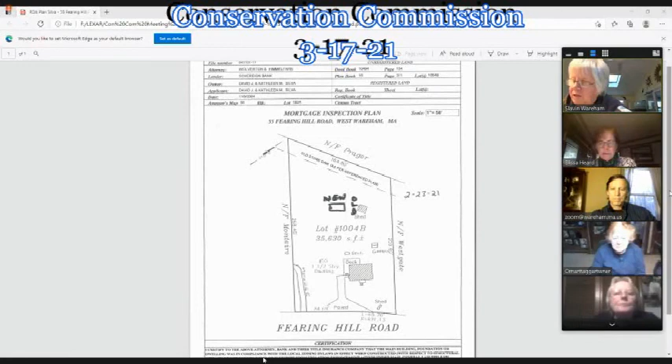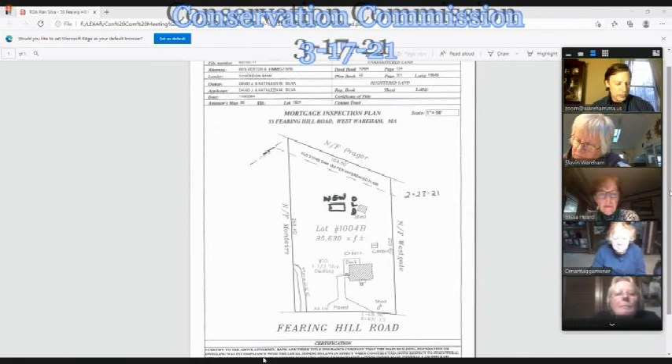Okay, this project is at 55 Fearing Hill Road, and the project involves the construction of a shed in the buffer zone to bordering vegetated wetland. A 12 by 20 foot shed is proposed, approximately 50 feet from the wetland at the site. The shed would be supported on 6 sonotube footings. The location where the shed is proposed is in the same vicinity as a previously existing smaller shed in the yard area of the site.

There's no tree cutting that would be necessary or machinery to be used for the project. So I would recommend the approval of the project with a negative determination number 3.

Okay, somebody has not muted themselves. Please look. Who's not muted? Someone's listening to a television or something. This is not pleasant. Thank you for the courtesy.

Okay, David, is there anything you wanted to add to that description? That Dave Silva or Dave Bichette? Dave Silva. Okay. No, I have no comment. Thank you. Questions on the board? Do we have anything from Michael? Zero, today seemed pretty basic to me. I'm good. Thank you. Elissa? No. Ron? No. Kwame? No. Mary? No question. Carol? Sandy, I'm all set. Is there anybody online that would like to speak for or against this project?

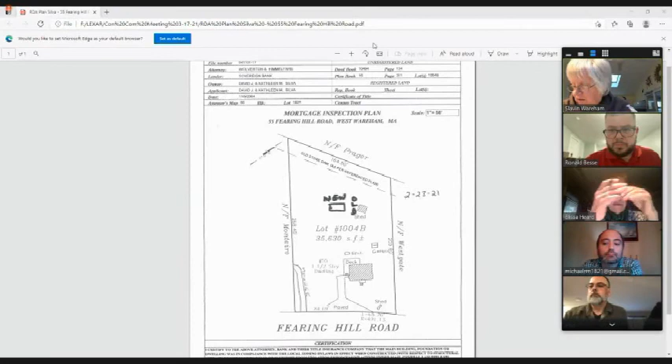Hearing none, I would move to close the hearing. Second. Okay, I have a motion to close and a second. Michael? Elissa? Lisa? Ron? Yes. Kwame? Yes. Mary? Yes. Carol? Elissa? Yes. Sandy? Lisa? We'll try. Ms. Heard. I got that one. So yeah, the hearing, okay. All right. The hearing is closed.

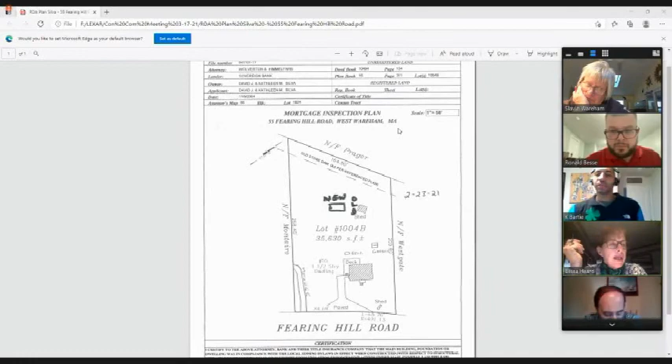We accept the project as stated with a negative 3. Second. Second. I have a motion and a second in favor. Michael? Yes. Ms. Heard? Yes. Yes. Did you? Oh, Ron? Yes. Kwame? Yes. Mary? Yes. Carol? Yes. Sandy? Okay, it's approved. So David, see Mr. Bichette before you start the work, but you're approved. Thank you. Thank you. Good.

Pursuant to the provisions of the Massachusetts Wetland Protection Act, General Laws, Chapter 131, Section 40, and the Wareham Wetland Protection Bylaw, Division 6, a public hearing will be held on Wednesday, March 17th at 6:30 p.m. Here you go. All yours. On the request for determination of applicability for Paul Somers, 6 Oak Terrace, Wareham, Mass. 02571, to construct an addition located on Assessor's Map 39, Lot T25, 25 Oak Street, Wareham, Mass. Yes, is there anybody here to speak for this project? Please identify yourself. Yes, Paul Somers is here. Thank you. Mr. Bichette will read to the project.

The project site is at 25 Oak Street, and the project involves the construction of an addition in the buffer zone to a coastal bank at the site. A 13 by 14 foot addition with an extension that goes across the front of the house, which is approximately 5 feet wide, is proposed. And this is approximately 50 feet from the top of the bank, which is a seawall at the site. The addition would be constructed between the street and the house as shown on the plan.

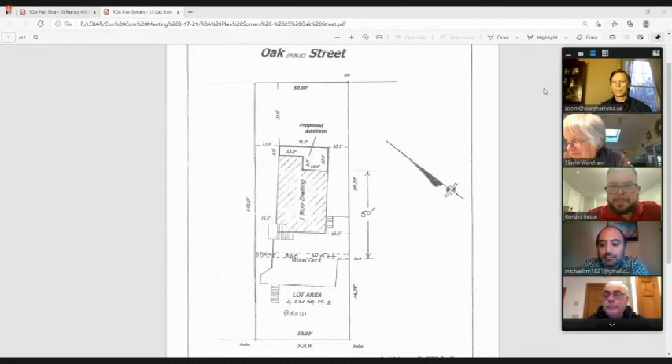Thank you. Before I ask the board, I want to make clear that Paul and I are next door neighbors on his home, not where this one is located, but we do have a common lot line, and my cat visits him all the time. So I will ask the board for questions. Michael. No questions. Miss Heard. No. Ron. No. Kwame. No questions, thanks. Mary. No question. Carol. No questions.

My question, this is going to be between the house and the wall that exists there already, right? That is correct. So the wall will be the edge of the addition. No, not quite to the wall. Not quite to the wall. Okay. We're extended out 13 feet from the existing house, and we're about 8 feet from the wall. Okay, it was not staked out. I felt the wall was probably one of the outermost limits of the addition. No, we are probably 8 feet from the wall, the existing wall on the street side.

Does anybody want to visit the site if it's staked out, or are you comfortable with it as you've seen it on the plan or may have visited it? How about you, Sandy, since you know it? What do you think? Well, I visited it and I thought the wall was the extent. I mean, it's all flat. It's between the house and the concrete wall. It's no closer to the wall, to the water than his hard walkway.

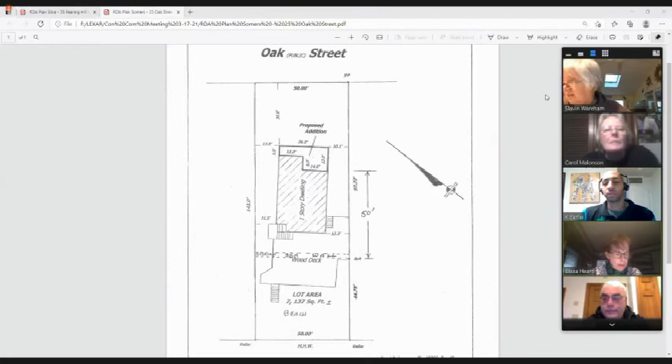So you're saying no question? Yeah. I'm comfortable. I mean, I thought the wall was the extent and he's not going quite as far to the wall, but I didn't need a stake to identify the location of this addition. Questions? We went through that. Anybody online that would like to comment on this project?

Yeah, just another question. Can you hear me? Yes, I can, Michael. Okay, because the last 2 times you asked my opinion, you just said Ms. Heard. So I just want to make sure you heard me. All right. I hear you. Thanks.

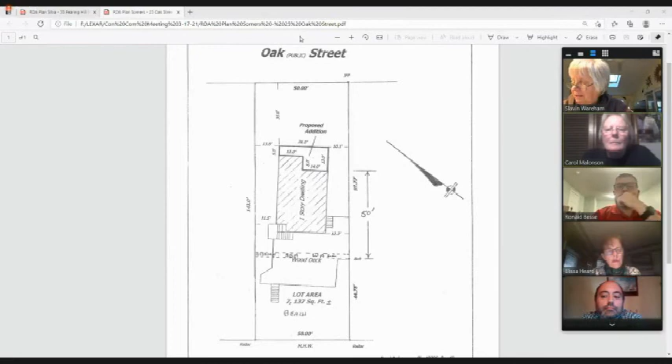I'm hearing none. No comments. Motion to close. I have a motion to close the hearing. Second. I have a second. All in favor. Michael? Yes. Ms. Heard? Yes. Ron? Yes. Okay. Yes. Mary? Yes. Carol? Sandy, the hearing is closed.

Yes. To accept the project as stated with a -3. Second. All in favor of a -3, Michael? Yes. Ms. Heard? Yeah. Ron? Yes. Kwame? Yes. Mary? Yes. Carol? Sandy? Yes. It is permitted. And Paul, see Mr. Bichette before you start any work on the project, and thank you.

Oh, I have a quick question for you. You're going to be parking off the street, right? Yes, we are. Thank you. You're very welcome. Thank you, folks. Appreciate it. Have a nice night.

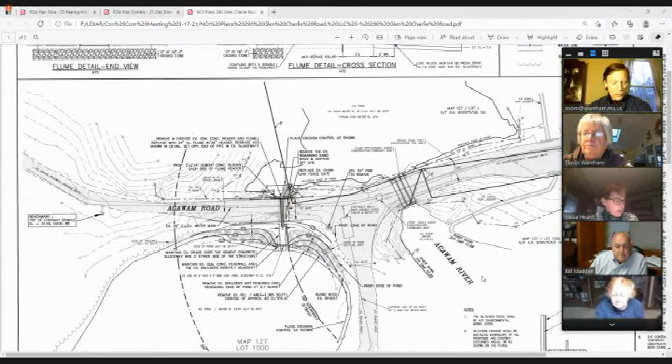Thank you. Is there anybody here for this project to represent? Bill Madden, on behalf of the applicant from GAF Engineering. Hi, Bill. Mr. Besse, your turn. Okay, so the project site is at 290 Glen Charlie Road, which is the Maple Park Campground. And this project is right next to the project we recently permitted to reconstruct the flumes under the access road to the campgrounds. This notice of intent is being filed to address a previous violation that involved unpermitted placement of fill in the pond by the previous owner.

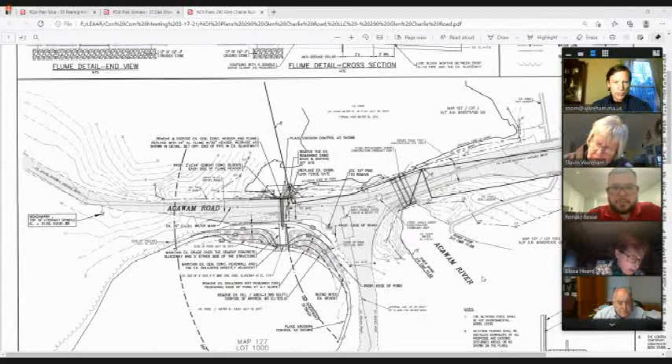This issue was discussed during the previous hearing, and it was a requirement of the order of conditions that they follow up with a notice of intent to address this previous violation. So this project involves the removal of fill material from the pond, and the site is also within the estimated habitat of rare and endangered species. An excavator will scoop approximately 90 yards of material out of the project area, loaded into trucks for removal to achieve the grades shown on the plan. And that's all sort of within this area right here where the cursor is moving around the plan.

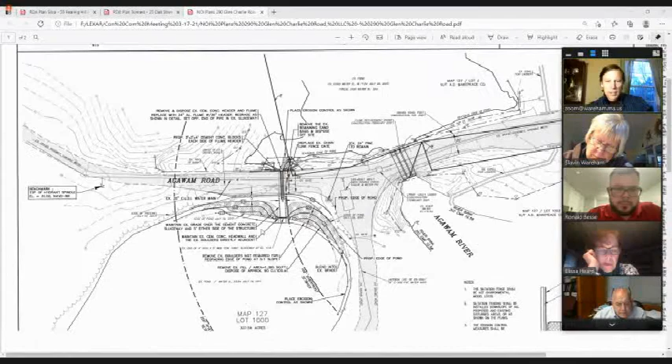Also proposed is to construct a small Traprock detention basin at the end of the entrance road, which is closest to Glen Charlie Road. And this would be approximately 50 feet in length and about 6.5 feet wide, and would be right up against the 30-foot no activity zone. And I'll just have Bill kind of explain the reasoning for that. I think there's a small area where it tends to wash out and gully a bit. That's why that is being put in there, I believe.

We did get a DEP file number for the project, but at this point, I have not gotten any comments from Mass Natural Heritage on this project. So I would have to recommend a continuance for their comments until the next meeting.

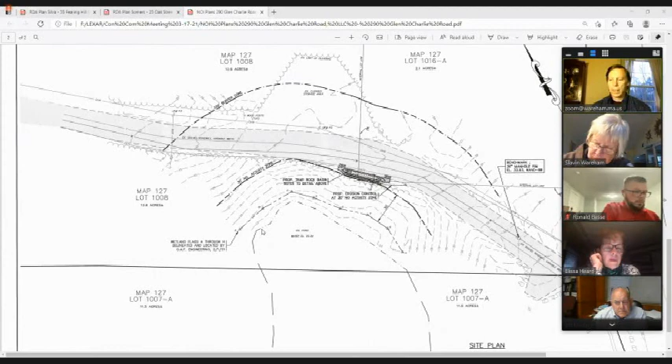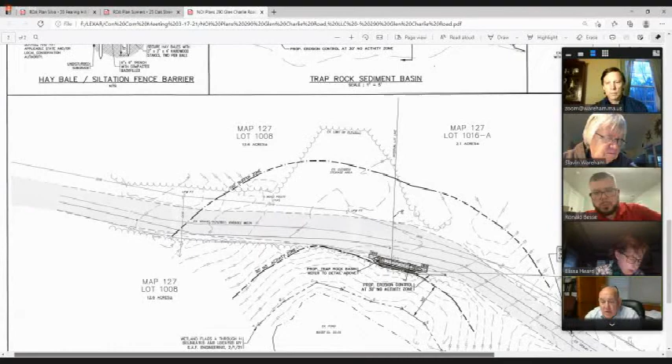Hey, Bill, can you comment on? Yeah, sure. That area that we're showing the Traprock sediment basin is right against the edge of the gravel road into the park. It looks to me that might have been graded in a manner that would allow water that collected there to drain off the site into the adjacent land.

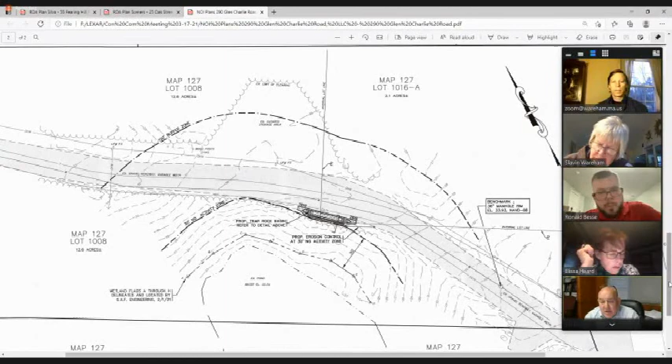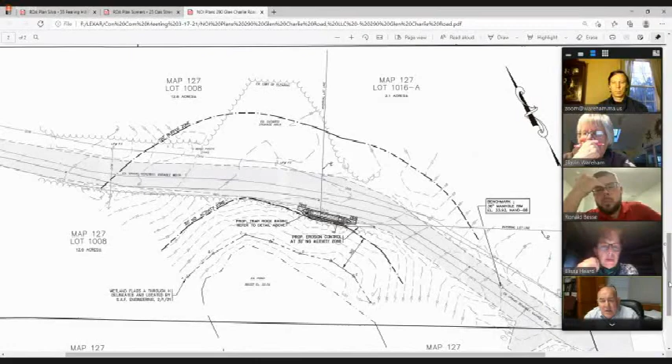So in an effort to retain the drainage characteristics there, we thought it would be wise to place this Traprock basin at that location so that we could intercept the water, trap the sediment, and allow any excess water to overflow relatively sediment-free into the buffer zone. So we took the footprint of what was there and we fit that little Traprock basin in there. There's a cross section on the top portion of the sheet to the right-hand side that'll probably show that it's roughly 6 feet wide.

That number 28.5, that's the elevation of the roadway. The 28 is the elevation of the top of the Traprock basin. We show it being excavated roughly 18 inches deep and filled with stone to trap the sediment. We also separate the filter stone from the subgrade through the placement of a piece of filter fabric so that in the event that basin needs to be maintained over time, it's readily excavated out and stone replaced.

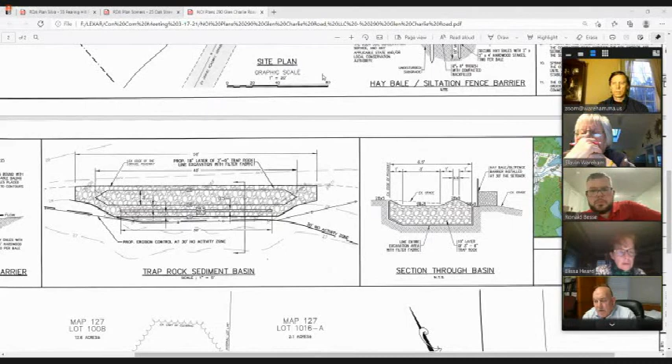We also show a hay bale and silt fence barrier that's right at the property line. So really it's a filter berm of some type to trap sediment and prevent any alteration of the resource area. That's what we have proposed at the entrance. Can you talk about the fill into the pond? Sure. What it will look like when you're done?

Well, what it'll look like when they're done is there's an existing concrete sluiceway that goes under Agawam Road. So starting on the north side of the pond, that's a concrete flume structure now that's in total disrepair. So we would like to replace that with a new aluminum structure, anchor it in place with a couple of 2 by 2 by 4 foot concrete blocks,

remove some of the super sacks that are in that area from 10 years ago, and reshape a little of that disturbed area around those blocks, and regrade that off just slightly. I didn't see where I noted on the plan to permanently stabilize that area, but I would maintain that we would stabilize that in the manner that we did on the flume construction project. And seeing as we're continuing the hearing, I'll add a note for that permanent stabilization.

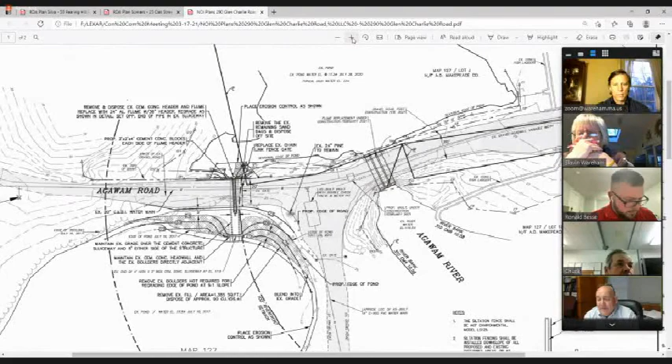That aluminum barrel section will be placed inside the concrete sluiceway. And what we tried to do is just maintain the top of the sluiceway. And I was hoping to grade it in a manner that we wouldn't create a hazard to somebody if they found their way on the top of it. So we slope it off at a 5-to-1 from the top of the slope, which is right about elevation 25, right to where the road is, down to elevation 22. So we'll have a 5-to-1 very gradual slope, similar to what you see on other portions of the pond, particularly down along the west side of the access road into the campground.

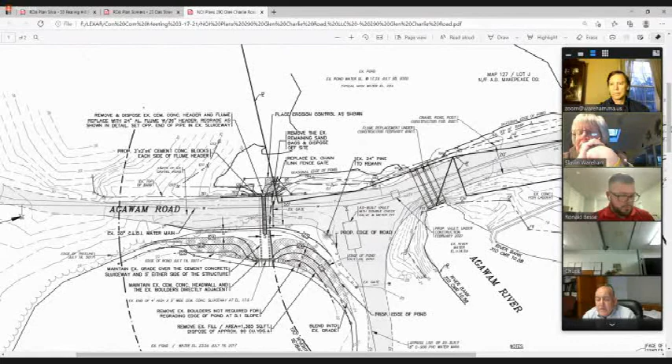Bill, excuse me, Chuck, will you please mute yourself? Chuck. Oh. Thank you. I'm sorry, Mr. Madden. Continue. That's a little time consuming. That's fine.

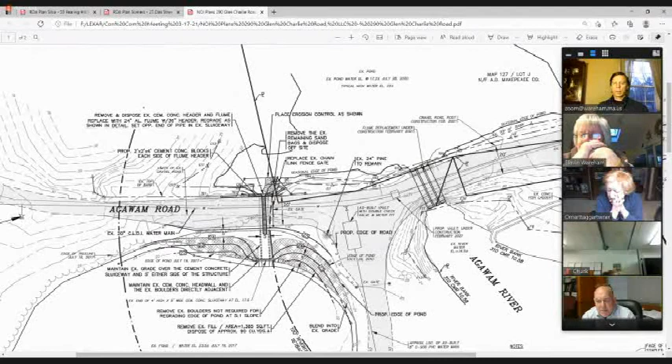So essentially what you're going to see is very similar to what you see along the west side of the access road into the campground. And it will be a gradual 5-to-1 slope beach area. It'll be strictly sand. There's no vegetation proposed. Historically, that's the way that pond was. We wish we didn't have to remove the material, but if it's the wish of the commission, we will do that. That's pretty much what we will have there.

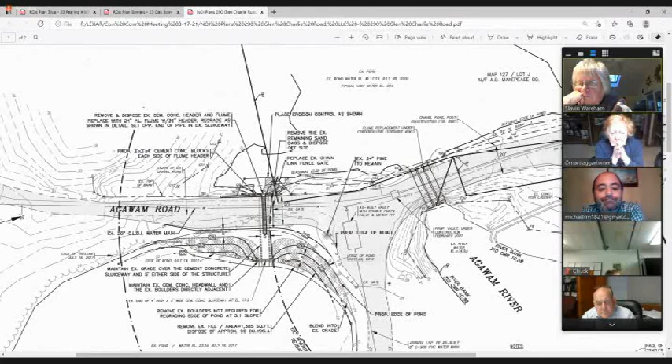Thank you. Okay, questions, Michael? No, none. Ms. Heard? I guess the only question I had is that last comment by Bill. Is there any way that it can be left where it is, Dave? Or is it just... Well, the fill is the subject of the violation. So that was put in there where it should not have been placed. And that's why the proposal has come forth to remove it.

And the fill won't be anywhere near that place when it's redone? Well, they're going to truck the fill away from what I'm told. Right. But I mean, they're putting something back in its place. Is that correct or no? No. So basically they filled in part of the pond previously and now they're removing the fill. So it'll just go back to being more pond. Okay. But there'll be a beach or a swim area. Is that what I'm getting?

It's probably outside the actual swim area for the park, but it will be a sandy beach area. We expect that the material that's underlying the fill is going to be very similar in character, if not identical, to the fill material. So it'll be pretty close to what it was prior to the placement of the fill.

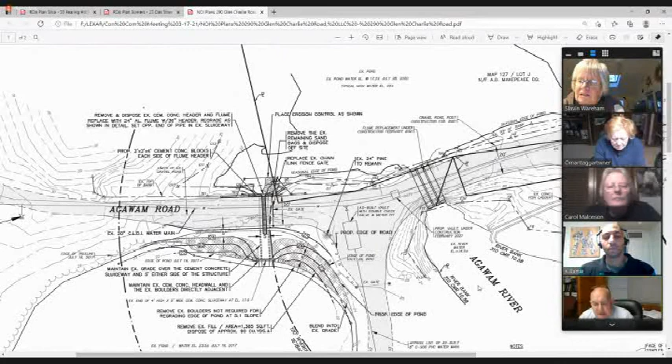Okay. Ron? No questions. Kwame? No questions, thanks. Mary? No questions. Carol? No questions. My question is, people could still go down there, right? To be on the edge of the pond if they want to fish? Well, I don't know if that pond is open for fishing. I know along the west side of it, as we go down toward where the gate is into the campground, I know that there's signage posted about no fishing in that area. Okay, thank you.

Okay. Anybody on the line would like to speak to this project? Are we good to continue it until April 7th, waiting for the natural habitat comments? Yes. Okay. I move that we postpone this decision until the next meeting, which is April 7th. Okay. I have a motion to continue until April 7th. Second. I have a second.

All in favor, Michael? Miss Heard? Yes. Ron? Yes. Kwame? Yes. Mary? Yes. Carol? Sandy? Okay, yes. Until the 7th. Thank you, until we get the documents we're missing. Thank you. Public hearing.

Pursuant to the provisions of the Massachusetts Wetland Protection Act, General Laws, Chapter 131, Section 40, and the Wareham Wetland Protection Bylaw, Division 6, a public hearing will be held on Wednesday, March 17th, 2021 at 6:30 p.m. on the notice of intent for John Chuckran, care of Michael J. Koska and Associates, Inc., 98 Broad Street, Bridgewater, Mass., to repair a seawall located on Assessor's Map 3, Lot LC1 & LC2, 28 Fishermans Cove, Wareham, Mass.

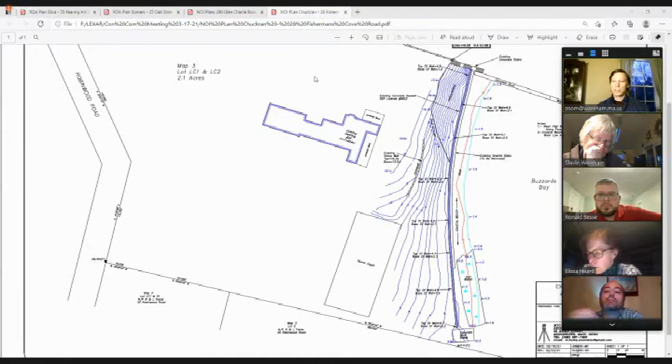Okay. And then you mentioned that there might potentially be other permitting agencies. Do we know who they are other than waiting on some comments from the Marine Fishery? In the DEP file number comments, they mentioned that the Army Corps of Engineers may need to look at it, or there may need to be a 401 water quality cert. So I think those are things that other agencies would have to address. I think it was just stated on the file number sheet, but that's something that would come after an approval from us if we approve the project. Okay. That's it. Thank you.

Yeah. Kwame? No questions. Mary? No question. Carol? No questions. Sandy, I have questions. Is the seawall down there failing now? It's in disrepair in the sense that I believe they've analyzed it and that it needs to be reinforced. That's why the material is placed in the front of it. So we're trying to get rid of the material in the front of it and increase it for the next 50 years or so. So that's why the riprap was placed in front of the granite blocks? I believe so. As I said, I'm assisting with it, but I think that was the purpose, to increase the stability of it. And it needs to be done correctly so that we can remove those granite blocks.

The stakes that were on the site, what do they represent? They may be survey control points. I'm not sure what those represent. So the top of the new seawall will not go any further into the lawn than what's there now? Correct. The top of the seawall is going to be I think 8 inches or so higher than what's there now. So it's not going to come landward. Okay, it'll just go higher, not wider.

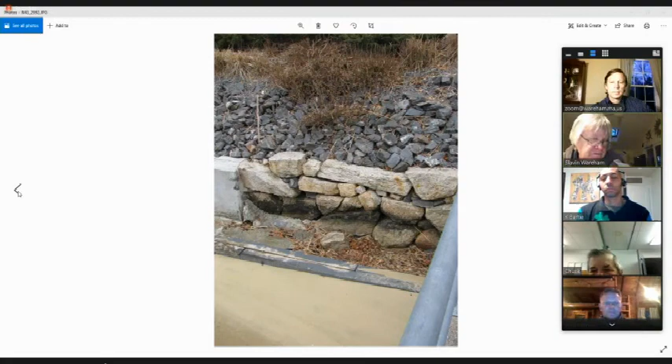So there'll be no machinery on the beach at low tide to make that happen? There will be small machinery, a kind of mini excavator. And how will you get that in and out of there? Down the existing boat ramp. Boat ramp. The minute I asked the question, I said, there's a boat ramp on the west side. That's how they're going to get down there. So Dave, we're going to have to make a stipulation that all work must be done at so many hours between low tide. Yes, that would be agreeable.

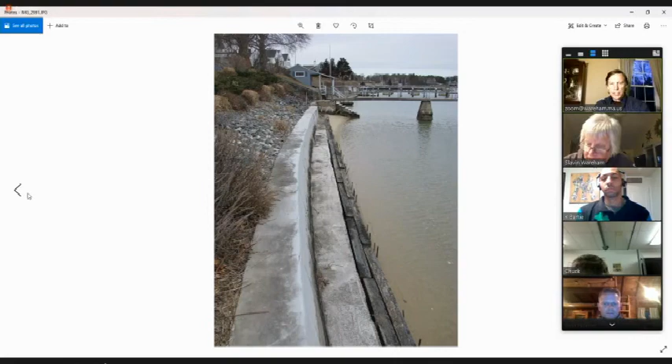Yeah, this is not something I had been made aware of before, as far as there needing to be some sort of a small machine on the beach. I was under the impression that they would pluck those things out with an arm reaching over the top. If there's going to be some sort of machine, then yes, we would definitely, when the time comes, have to condition that we have construction mats, if that's the methodology the commission is comfortable with allowing, and it certainly would have to be done at the appropriate tides.

Okay. I think that was me. So you're saying that the granite blocks will be stored on site upland? Well, they may remove them completely from the site, but I thought I heard them say that the granite blocks would be stored upland. No, Brad? Once the granite is removed, it would be advantageous to haul it right off the site, since the machinery would have it in its grasp, and therefore it would make all the sense in the world to just haul it right off site.

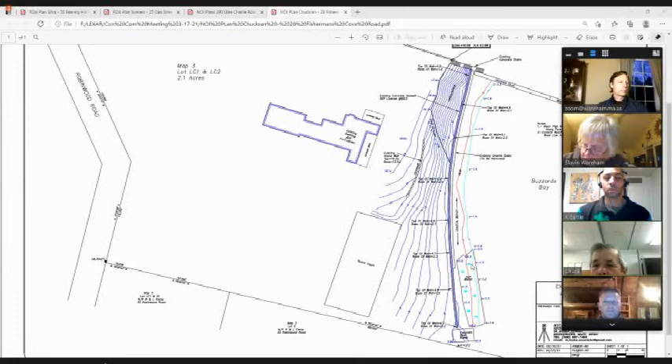Okay, and the same thing with the concrete that's going to be broken up? Yes. Now, how do you plan to maintain the soil in the upland when all this machinery is going to be going over it during the soft soil time, as opposed to winter? That would be accomplished with landscape mats, so the equipment would be going over the mats covering the lawn area, hence creating no or very minor disturbance. Okay, thank you. Is there anybody online that would like to speak for or against this project?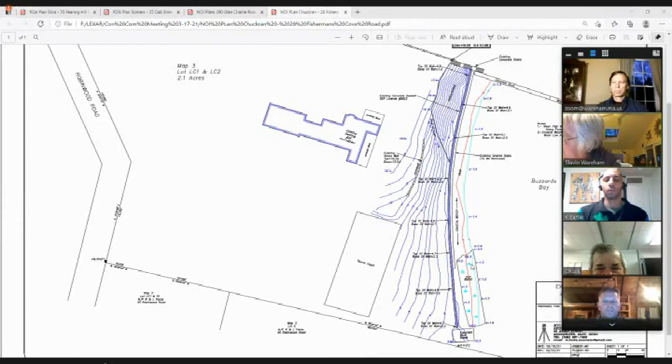I'm seeing none. I'll take a motion. Do you think we would have the answers from Mass Marine Fisheries by the 7th, Dave? I think we should by then, yes. Then I'd take a motion to continue until April 7th. Motion. I have a motion. Second. I have a second. All in favor, Michael? Yes. Ms. Heard? Yes. Ron? Yes. Kwame? Yes. Mary? Yes. Carol? Sandy? We're continued until the 7th, waiting for some input from Mass Marine Fisheries. Thank you, everybody. Thank you, members of the commission, for the time tonight.

Notice of public hearing pursuant to the provisions of the Massachusetts Wetland Protection Act, General Laws, Chapter 131, Section 40, and the Wareham Wetland Protective Bylaw, Division 6. Public hearing will be held on Wednesday, March 17th, 2021 at 6:30 p.m. on the notice of intent for TJP Realty Trust, LLC, care of Cape and Islands Engineering, 800 Falmouth Road, Suite 301C, Mashpee, Mass. 02649, to widen and resurface a gravel roadway located on Assessor's Map 20, lots 1041-A and 1042-A, Shell Lane, Wareham, Mass.

Anybody here representing this project? Good evening, Matt Costa for the record. The what? Okay. So, Mr. Bichette?

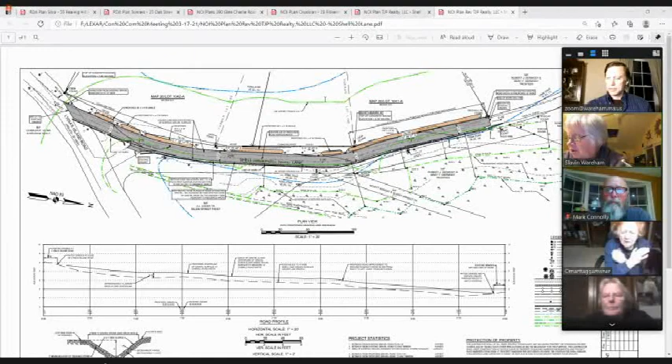Hearing none, we can close this, right, Dave? We're not waiting on anything. That's correct. Motion to close. I have a motion to close. Second. I have a second to close the hearing. Michael? Yes. Ms. Heard? Yes. Ron? Kwame? Yes. Mary? Yes. Carol? Sandy? Yes. It's closed.

We're going to ask for a standard order of conditions plus several components to it. Let me try to say it. The surface material must be natural gravel. The road cannot be paved. It must remain pervious. All plowing is to be done in such a way as to not move gravel toward the wetland and maintain the proposed grade. Did I get everything? And what about the fact of not having grass? You wanted something more natural where they were going to plant? They're just going to throw seed down.

That was the concern, with it being on the other side and not where the drainage areas are going to be. And even with that, I think Matt had mentioned they're going to try to use more like a wild seed mix type of mixture. Yeah, because there won't be a lawn and there won't be mowing. Well, there may have to be some weed whacking or mowing at some point. Otherwise, it may not function the way it needs to. So there would potentially be some maintenance that would have to occur in those swales in terms of trimming now and again. Yes. Do you want to put that in the order of conditions?

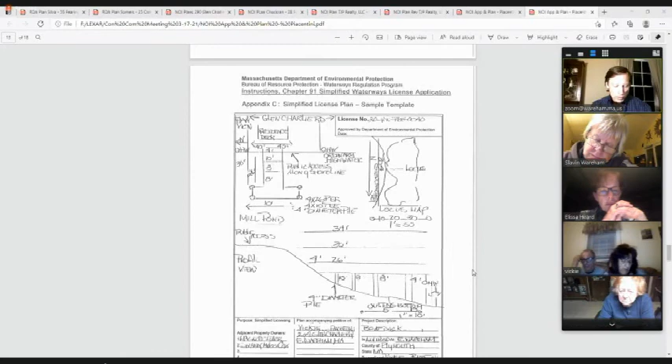It would be my recommendation that the dock only be a straight length without the T, because that's typically what we have been requiring to minimize the footprint area. So I would recommend it be the 4 by 30 feet or 34 feet, whatever it might be, but without the T on the end. When this is removed during the winter time, storage of the dock section should be outside the 30-foot no activity zone to the pond.

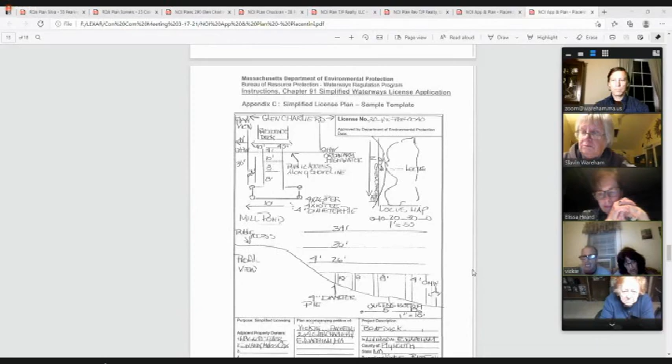And as far as the project, we did not get a DEP file number as of yet, and we also have not received any comments from Mass Natural Heritage on this project. So at this point, I would have to recommend the hearing be continued until we get those pieces for this project. Thank you. Vicki, anything to add? No. That's it. I'm the husband, Richard. The T at the end, that's not a problem, but do you want me to send something to you from the dock people without the T? Yeah, we would just have a revised plan, to just show the straight dock. Okay, yes.

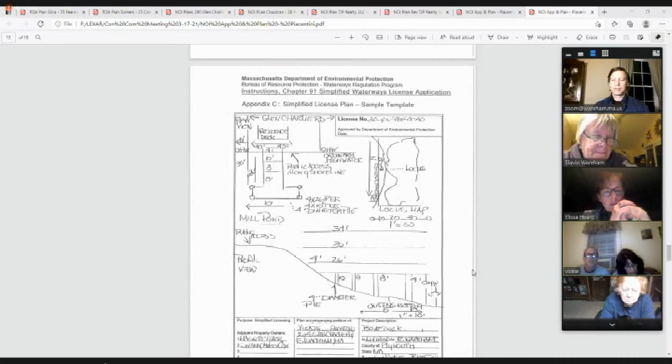Questions on the board, Michael? Yeah, I got a question. I was there yesterday, and when the dock is in use, typically where in the backyard would it be? Because I didn't see any stakes in the area. You went from where? I'm sorry. Pretty much in the middle of the waterfront on our property. Okay. I thought that would be the case, because if memory recalls, there were some old stone steps going down to the water over that area. Yes. Okay. That's what I thought. Thank you.

Ms. Heard. Are we going to ask that this be staked? Yes, I was going to ask that it be staked. So that means during the next 2 weeks, they could stake it. Yes, we need to identify where the access to this dock will be placed on their land. And when you say stake, wooden stakes? Yes. With a little note on each stake is nice. Okay.

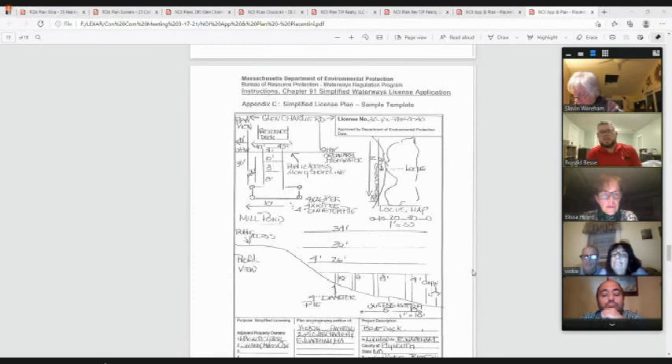All right. Anything else, Ms. Heard? No. Ron? No, that's all I was going to say, is staking to see exactly where it is. And then obviously we're waiting on a couple of other things anyway. So if I have any questions, I can ask them at the next meeting, but nothing else right now. Kwame? No questions. Mary? No question. Carol? No questions.

Sandy, I have a question. Will this dock be in the water? Yes. Why do we need the staking? Well, will it just be floating? I mean, you have a fairly steep slope. How will you get down to the edge of the dock?

Well, it is steep, but you know, I walk down it now. We just bought the house in December, so we were just planning on the summer. We knew it was a process to get this approved.

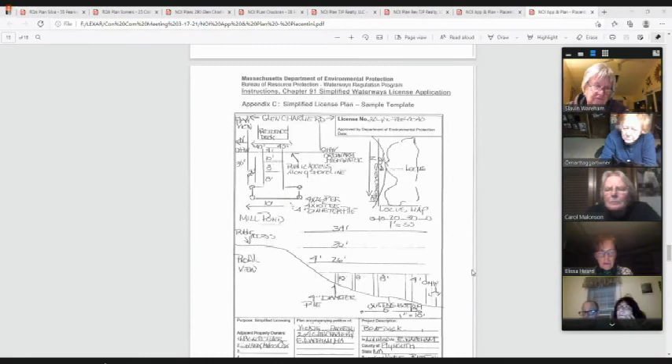I mean, maybe my next step would be to go through it and see if I could put some, like my neighbors have, stairs that go down to their water edge. But right now, yeah, you can walk down the hill. You can walk down it. As long as we're not permitting at this particular time, you're not asking for stairs. And if you want, you've got to come back to us and ask for that.

Right, but we can walk down the hill to get on the dock. That's not an issue. I walked down there today. Okay. And how are you going to remove the dock come winter time? It's detachable and I just pull it out onto my back lawn.

I think that's what we have the problem with. You're going to drag it over the slope of the bank, correct? Drag it over the slope. Yeah, it comes in sections, so I would carry it up. I wouldn't be dragging it. I don't know, this is the first time we've ever moved near water. How far up does it have to go from the water edge during the winter?

I think, Dave, it has to be above the 30-foot no work zone from the water's edge. Okay. Yeah, and I have no idea where that 30-foot zone is. There's nothing on your particular document that tells us where the 30-foot line is. Okay, so you mean from the end of my lawn down the slope to the water edge, that's where you want it taken?

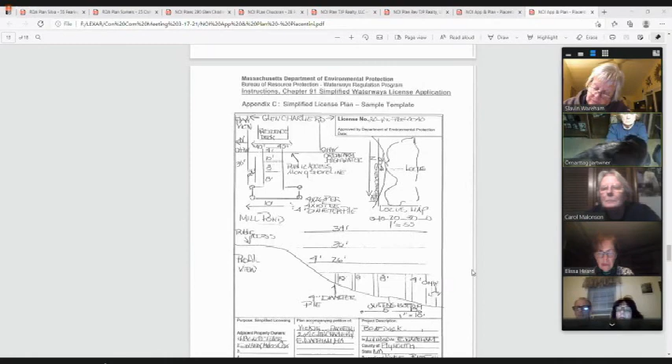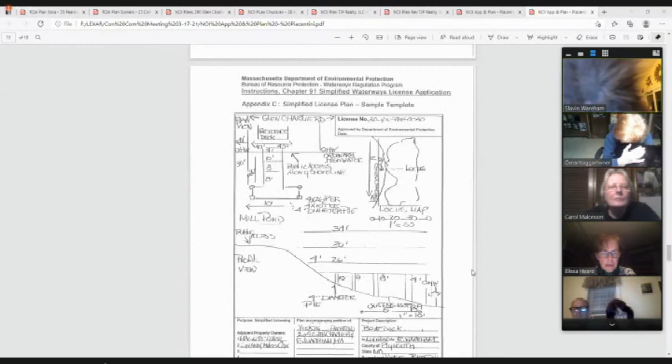Okay, is there anybody here that would like to speak to this project? Because we're going to have to continue it. Hearing none, the only thing that we ask for is that the applicant find some way to stake out where the 30-foot area is off the water and where the mat for the dock would be placed, and also how they're planning to get to the dock. Well, they just said they're going to walk down the slope. Walk down the hill. I can walk down it. I just walked down it today.

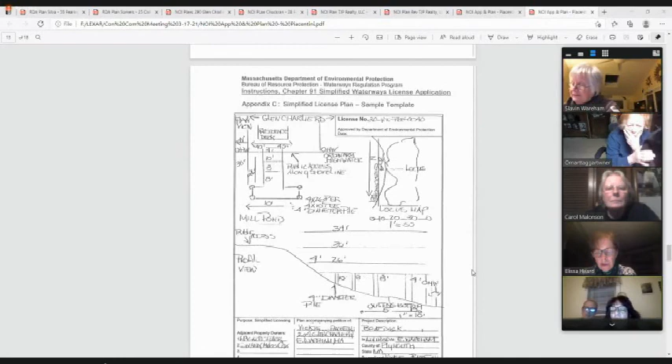All right, so I need a motion to continue until April 7th. Motion to continue until April 7th. Second. A motion and I have a second. All in favor, Michael? Yes. Ms. Heard? Yes. Ron? Yes. Kwame? Yes. Mary? Yes. Carol? Yes. Sandy? Yes, we're continued until April 7th. Thank you. We have continued hearings.

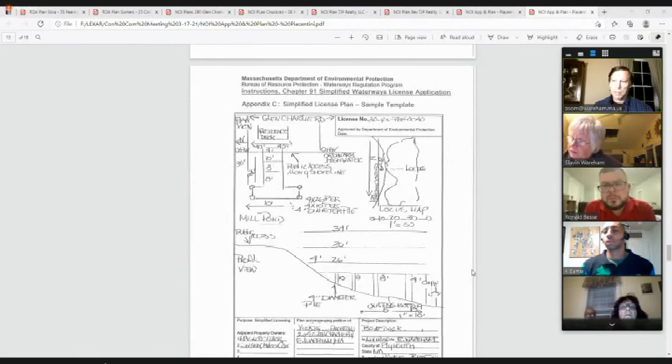We have a Wareham QOZB. They've asked to be continued. Dave, did they give you a date? To the next meeting, April 7th. Great. Is there anybody here for this particular project? It has to be continued.

Okay, I'll take a motion to continue until April 7th. Motion. Second. I have a motion and a second. All in favor, Michael? Yes. Ms. Heard? Yes. Ron? Yes. Kwame? Yes. Mary? Yes. Carol? Sandy? Yes. Until the 7th.

Thank you. The next one we have is Roger Keyes. Anybody here for this project? We did get a revised plan. Yes, Madam Chair, Jim Peterson from Alpha Survey. Thank you, Jim. Mr. Bichette? Okay, let me just get this up here. I gather we got the DEP? Yes. Okay.

Okay, so this project site is at 7 Harborview Lane. This project involves the construction of an addition, a garage, and a new driveway in the buffer zone to a coastal bank. A 24 by 26 foot garage and a 14 by 24 foot addition are proposed, approximately 65 feet from the top of the coastal bank. Excavation for the foundation had already been started at the site, so there is some activity that has already happened there.

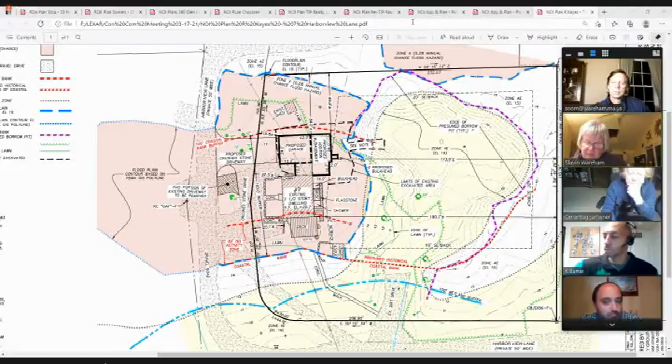Okie dokie. Jim, before you start anything, get a hold of Dave for the paperwork. Absolutely. Thank you. Okay, thanks to everyone. You're welcome. Have a good night.

Thank you. The next hearing is for Samuel Mello, and I believe we've got a request for a continuation until April 7th. Is there anybody here for that project? I'm hearing none. I'll take a motion to continue until April 7th. Motion to continue. Second. I have a motion and a second.

All in favor, Michael? Yes. Ms. Heard? Yes. Ron? Yes. Kwame? Yes. Mary? Yes. Carol? Yes. Sandy? Yes, it's continued.

The next hearing we have is for Borrego Solar Systems for 140 Tihonet Road. Anybody here for that project? Good evening, Stacy Minihane with Beals and Thomas, and Zach Farkas with Borrego Solar is on the line as well. Thank you. Dave? All right, yep, I'm just pulling the plans up here. Certainly been a lot of discussion on these projects.

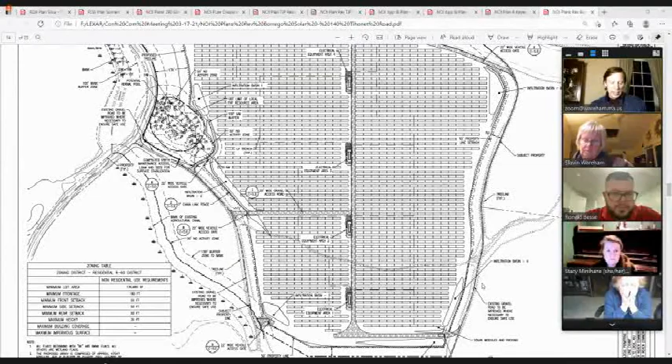Okay, so the project site is the 140 Tihonet Road project site, and the project involves the installation of a solar array within the buffer zone to bordering vegetated wetland and to an inland bank. A 5 megawatt solar array is proposed within the buffer zone to the wetland and the isolated wetlands at the site. And it's proposed to clear approximately 76 acres of land of existing mixed pine forest to accommodate the project.

Work proposed would be to the limit of the 50-foot no activity zone line in several locations. And the project would also result in the removal of 1.6 million yards of sand at the project site. This is something that hasn't come up previously in discussions about this. So I did have a question about what kind of actual time frame would it take to move that kind of volume of material.

The plans have been revised since we initially started looking at this to reflect changes recommended by the commission, by the town engineer through the planning board review. The town engineer has completed his review of the project and has made some recommendations that the planning board could issue the special permit for the project based on the latest plan set, which is dated 2/19/21, with some recommended conditions.

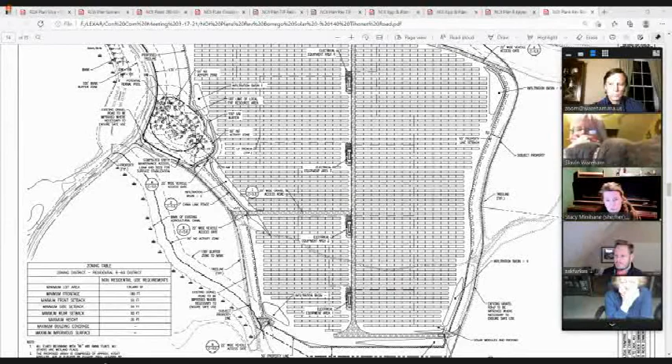Dave, to answer your 50-foot question, it remains true that the only work within the 50-foot for which we had requested a waiver is in the southwest corner of the site. You can see there's an existing access road that comes down to the south and then bends right near this agricultural canal. So that wetland symbol there is for an existing agricultural canal. And that road passes through the 50-foot under the existing condition.

To the extent necessary, if it is necessary, we're asking that the commission allow that road be improved on the landward side away from the canal to facilitate access. There's no other grading, stormwater fence, or any other work like that within that 50-foot, as we had discussed with the commission at the last hearing.

So to clarify, the perimeter fence will be outside the 50-foot. Yes, the perimeter fence is actually very close to the basin. And I do actually have a little rendered markup because I knew that this had been a question before, and it's challenging to see on the plan. So if it's helpful, I'm happy to pull that up. But yes, it's well outside of the 50-foot. And let me correct myself on the cubic yards of material. It's 1.3, not 1.6. I think I misspoke.

And what about the question of the time frame to actually move that kind of material? Sure, Dave. Zach Farkas here, for the record, Borrego Solar. Right now, we're contemplating starting the solar construction in the summer or fall of '22, which means basically they'd have approximately the time from the approval of this project until then to remove that material. Okay.

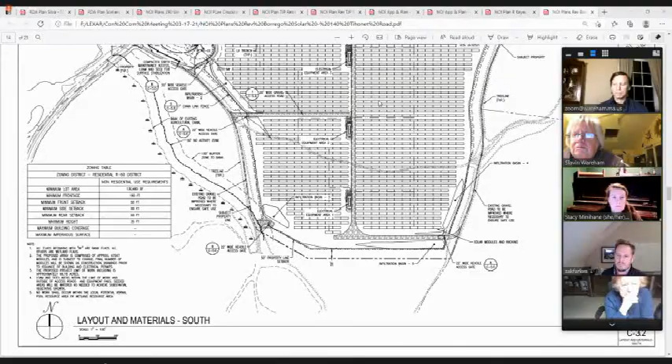We have how many potential vernal pools on this property? One potential vernal pool in the vicinity of the 140 Tihonet site. So there are 2 isolated wetlands. Yep, right there. The westerly isolated wetland did have egg masses in it when we undertook the vernal pool study. So that is a potential vernal pool, and a 100-foot setback has been maintained from that system.

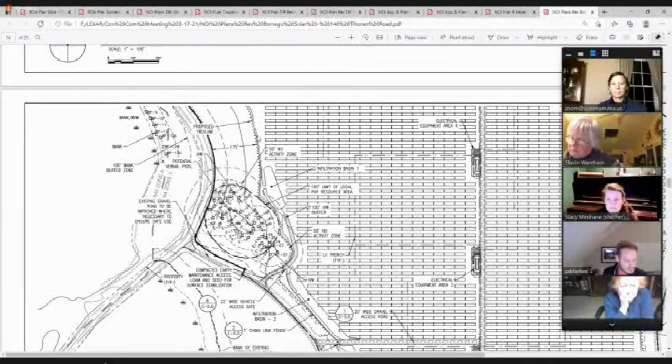All right, questions on the board? Excuse me, Molly. Come on. Sorry, I have a very annoying cat right now. Michael. No, none. Just heard. No. Ron.

Yeah, just one question in regards to the 1.3 million cubic yards of material to be moved. When was that decided or talked about? Because we've been talking about this project for a long time now, and this is the first that it's being brought up. So when was this decided or made necessary for the project to happen? Yeah, so this has, and Zach, feel free to jump in if you prefer, but this has been part of the project since the original submitted plans.

The grading has always been depicted as this, and I can't say off the top of my head if we addressed it explicitly in the Conservation Commission filing, but it was noted in the Planning Board application as well. So it's always been a part of the project that was discussed at the public meetings for it and shown on the plans. Yeah, so Ron, we've only seen the plan with the solar on it.

Buried in the doc, 70 some odd pages that came out in the notice of intent, there was a depiction of the hill. But it was there, but you're right. It's never been discussed at conservation, only did it come up with a discussion in planning that was, what? All that land has to go? Yeah, because it is quite a bit of earth to move. But that's it. That's the only question that I have.

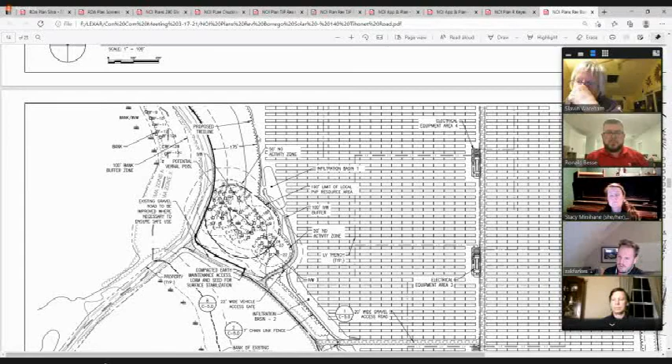Okay. I think the only comment, if I may, Madam Chair, to add to Stacy's comments is we are before the planning board and this commission for the solar project. The actual removal of that material will be contemplated under a different permit. It's not part of the project per se, but what we're trying to do is represent the future existing conditions prior to our start. Now, if the gravel removal does not remove that much, we'll be back in front of the boards revising our grading plans, but that was the intent.

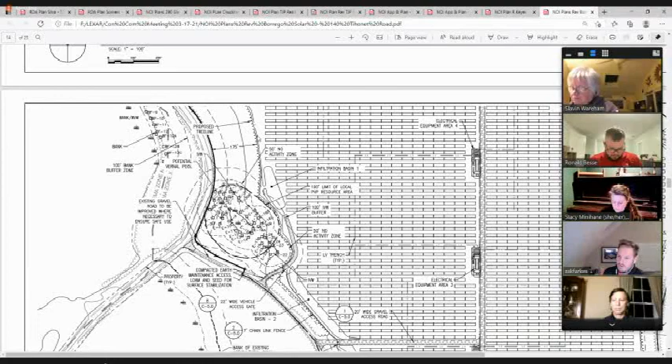And just to make it clear, this project approval does not necessarily trigger the removal of that material. A separate gravel removal permit per the bylaw would be forthcoming from the landowner, but it's separate and apart from this project. Thank you. Kwame. Yeah, I'm just trying to understand the facts, like who's this guy? The extraction of all these materials. I mean, where's this all going?

And as Zach said, that will be discussed when they ask for the permit to remove that particular soil. That really is outside of our scope. There is a particular bylaw in town that says where this soil can go within Wareham, or a fee for removing it from Wareham, and that's a completely different discussion. Okay. But my question would have to be what road would be used to remove all this, and will it be any close to the wetlands or the vernal pool in order to remove this soil.

But I digress. Sorry, Mary, any questions? Kwame, was that it for you? Yes, that was just a general question. Thank you. Mary? All this large removal, how will it affect the drainage in that area? That's a very good question.

Zach, Stacy? Sure. So the stormwater design maintains the existing flow paths. We have a series of design points if you look within our stormwater report, and those included looking at the various wetland systems individually as well to make sure that we're maintaining hydrology. So although the elevations are changing, the watersheds are not significantly changing. So the project site is in compliance with the applicable stormwater requirements.

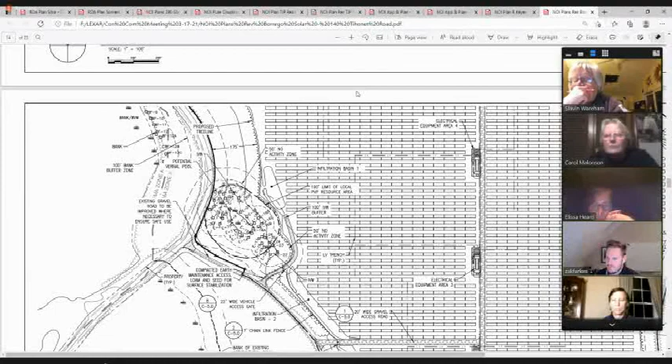So my other question is sort of a follow-up. What happens if this removal of this sand gravel combo isn't done? Does that negate your project? The way I would sum it up would be our plans, if they don't match the plans that are before you now, meaning what if a different amount of soil, more or less, is removed, then we'd have to come back in front of the planning board to confirm that, or modify our plans and modify our stormwater control report.

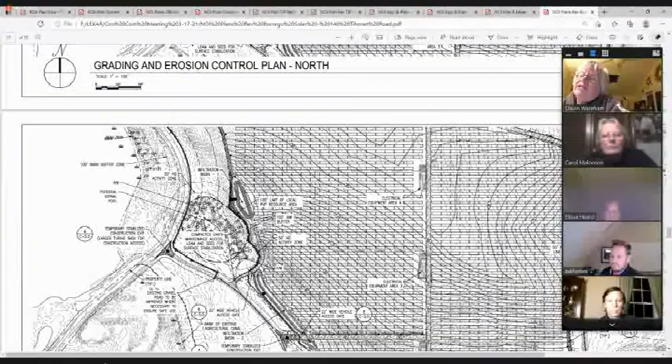I'm not sure if there'd be any additional jurisdiction here. There would be with the commission if the footprint of the project changed, but to simply say, if the plans are not constructed as they've been presented by Stacy and myself to planning board, we'd have to go back for a modification to that permit. Okay, thank you. So what you have, as Dave has brought up, is the particular plan that shows the elevations or the steepness of this particular hill that has to be removed. Am I reading that correctly, Dave? Yes.

And as anything else, I would be very concerned about the erosion control as the top soil is removed and all that under stuff is exposed and subject to stormwater erosion. But anybody on the call that would like to speak to this project, please identify yourself.

Nobody. Wow. Yeah. I think Miss Papalardo has her hand raised.

Good evening, everybody. I've been at most of these hearings also, and I just want to go on the record. Yes, I'm with the Wareham Land Trust. Yes, I'm also a citizen of Wareham. And I really wish people understood the value that the forests in this town contribute to our water supply, to cleaning the water, to the rivers that run by it, to cleaning the air, and they are one of nature's defenses against climate change.

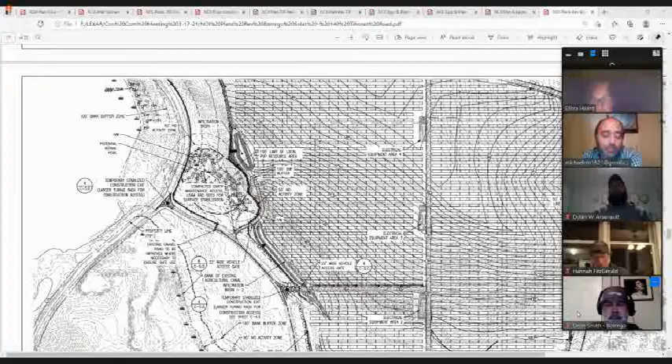And yes. I was going to say, not that it particularly matters because I think planning will certainly be set by them, but the requirement is to obtain or apply for all obtainable. So yes, okay, then I'll put it this way, apply, yes. All right, then we'll continue until April 7th. Thank you. Thank you all, have a good evening. Thank you.

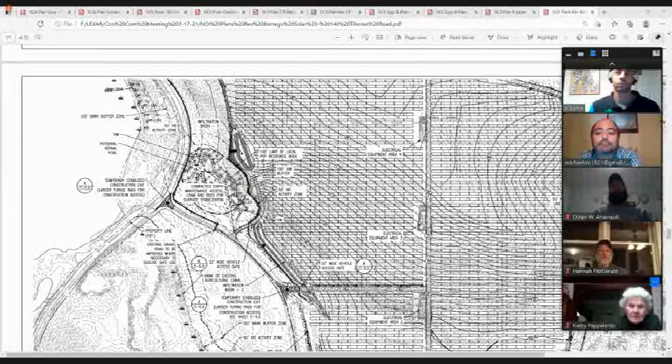All right, extension request. So this request is for a site at 31 Crab Cove Terrace, in the Parkwood area. This involved the reconstruction of a retaining wall and the construction of a deck at this property. The retaining wall part of the project has been done, but the deck has not quite been completed. Due to reasons relative to COVID and other issues, they just have not had the chance to finish that off. So they're requesting a 1-year extension for their order of conditions, which I would recommend.

So moved. Oh, sorry, Cindy. Yep, that's it. Second. I have a motion to extend for 1 year. I have a second. All in favor, Michael? Yes. Ms. Heard? Yes. Ron? Yes. Kwame? Yes. Mary? Yes. Carol? Sandy? Yes. So Ellis has an extension for 1 year.

Okay, enforcement orders. The first one we have is for Dylan Arsenault, and the site is 1067 Main Street. At this property, there's been some alteration of the land within the buffer zone to Tremont Pond. I had reached out and spoken to Mr. Arsenault. We met at his site and went over what was going on, and I've asked him to come into the meeting tonight to discuss that. Let me just pull up some photos here. And I see him here. Dylan, you can unmute yourself and Mr. Pichette will bring up some pictures and then you can speak to what happened. Thank you.

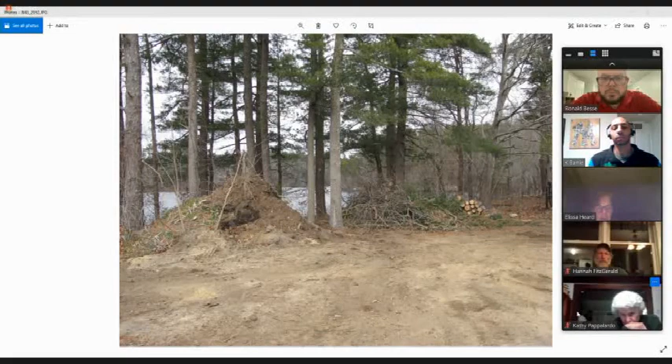And what there was, there was some debris at this site that I think was sort of there previously from another owner. And they ended up bringing a backhoe in and started moving some stuff around and kind of got doing a little bit more work than they should have without conservation approval. Then they kind of took some cuttings and stockpiled it down by the pond as well.

So again, in speaking to Mr. Arsenault, he's understanding that he's got to remove this material and that he's going to have to submit a filing with us to address some of these concerns and issues to get them straightened out. And again, this material here, he's stated that is all going to be removed. He just had it there temporarily, but that is going to be removed. And then there was a section here where some vegetation was cut. So that also needs to be restored as well. So that's essentially what we're dealing with here at this site.

Okay. Dylan, any comment? No, I'm present. I would like to thank Dave. He was very clear and helpful in explaining the violations and the concerns and the steps needed to rectify them. So thank you. No problem. Oh, that's a different site.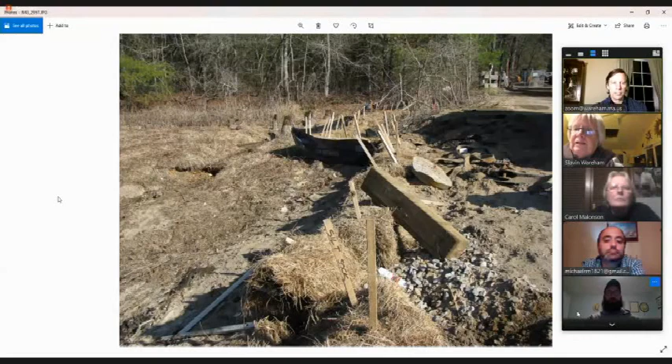Yeah. Okay. So we need to ratify the enforcement order. So moved. Second. I have a motion to accept and a second to ratify the enforcement order. Michael? Yes. Ms. Hurd? Yes. Ron? Yes. Kwame? Yes. Mary? Yes. Carol? Yes. Sandy? Yes.

So you'll be coming before us with a plan of restoration? Yes, I believe he's going to be working with JC Engineering, or at least that's what he had initially mentioned. Dylan, is that still the case? Yes, I'm getting a quote right now. I couldn't find the plot plan from when I bought the house, and from what I sent you, there seems like there's some discrepancies. So I'll get that surveyed, and then I'll send it over with the rest of the application that I already sent. Okay, thank you. So no more work. Thank you. All right, next one.

The one thing that he had asked is if potentially he could move that brush pile away from the pond and sort of either burn it or get rid of it. I'm fine with that if the commission's okay with it, because there's no reason to leave it there anymore. I asked him not to do anything further until the commission reviewed it, and therefore that's why he didn't do anything with it. Okay, so remove and burn the brush pile, remove the tires and things like that. So removal of the items there, I think, should be fine. Just no more clearing of the land.